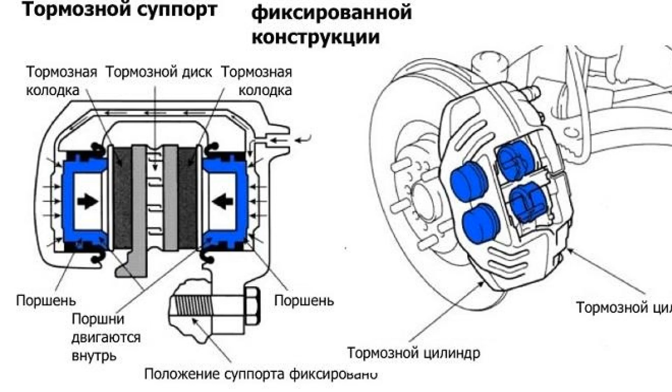Let's get into it. How the brake caliper works. As it was said above, the main mission of this element is to supply certain forces to the brake discs, leading to the stopping of the vehicle. To many people it seems quite ordinary and simple at first glance, but everything is much more complicated. Consider below what stopping a vehicle looks like in the case of a serviceable and well-oiled component.

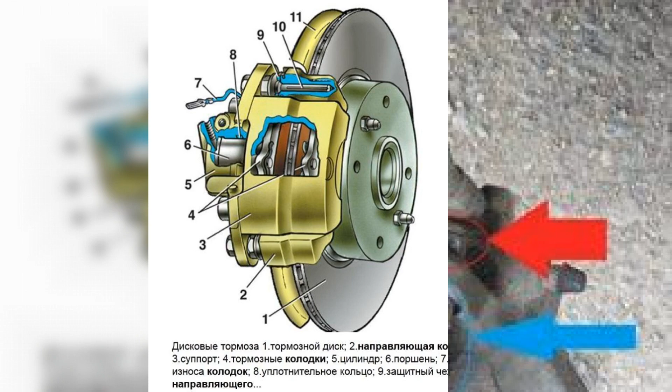The driver depresses the pedal, thereby creating the pressure necessary to transmit to the brake piston system. The caliper holds the stoppers against the disc, clearly and evenly. It's important to understand that the system clenches the disc on both sides, ensuring effective pad retention. No matter what speed the car is traveling at, the friction slows down wheel rotation. Of course, this is a very useful property, but there is a negative effect associated with physics and its laws.

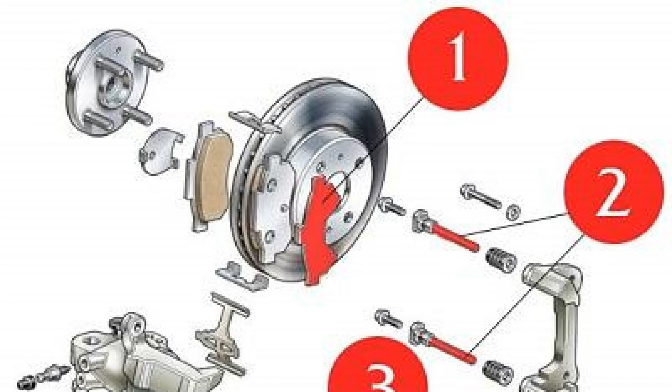The thing is that energy is never wasted. In this case, it simply changes. Note: energy, when it comes to this system, becomes thermal energy and heats up the brake fluid, the pads and the caliper itself. This a priori means that the latter must be robust, to withstand thermal loads, and on the other hand have sufficient heat dissipation to transfer heat efficiently and quickly.

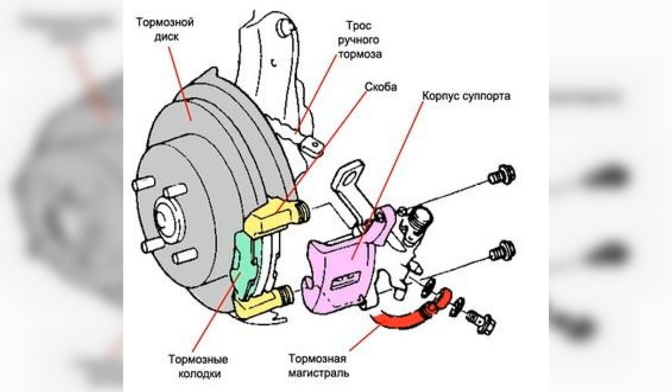Brake caliper problems. Let's take a look at the popular types of malfunctions. The second malfunction is associated with the rupture of the piston dust cover. As a result, dirt penetrates inside, shrinking the cylinder piston group from the inside and contributing to corrosion and splintering. Squeaking can be caused by the presence of skewed or incorrectly placed pads. Quite often pads are put by inept hands in reverse. They are simply confused in places.

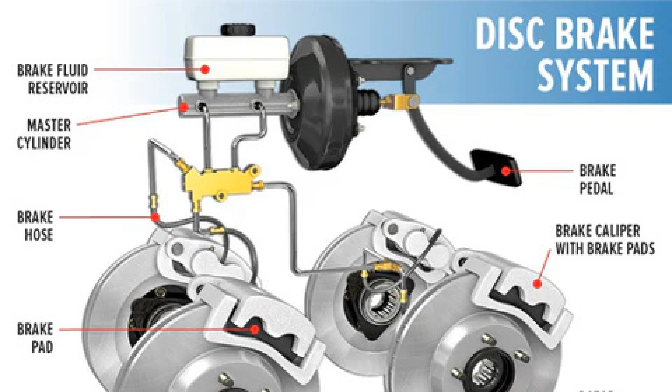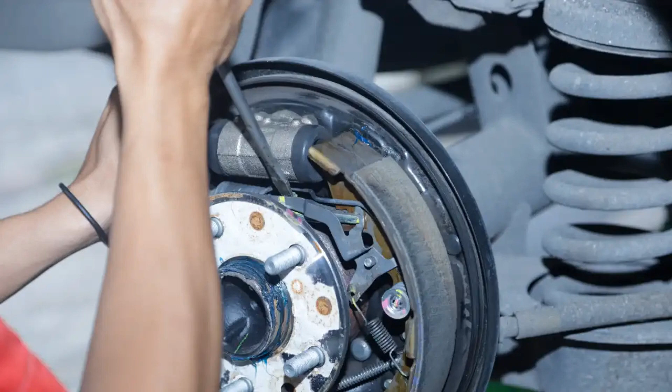As for the rupture of the dust cover, the reason for this is purely mechanical things. For example, if the discs wear out due to constant and excessive loads, and the owner of the car does not notice it, or there is simply no time and money to put new ones. Only a good lubricant can extend the service life of the brake caliper. We are not talking about ordinary brake guide lubricants, but about special ones. The latter are designed to eliminate not only the consequences of high-temperature loads, but also the effects of salt and dirt composition.

How to check the brake caliper? It is extremely important to timely diagnose the normal functioning of the elements. Below is an instruction describing the front caliper, its check and restoration. The task is as follows: disassemble the caliper, clean it, including from old grease, lubricate it with new special grease, diagnose the rubber sleeves and dust covers for their integrity, and if necessary, replace.

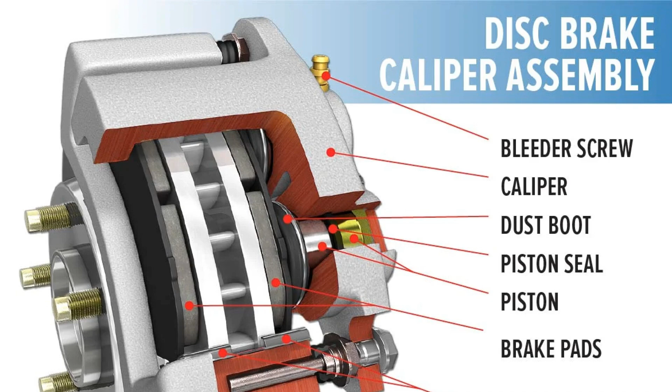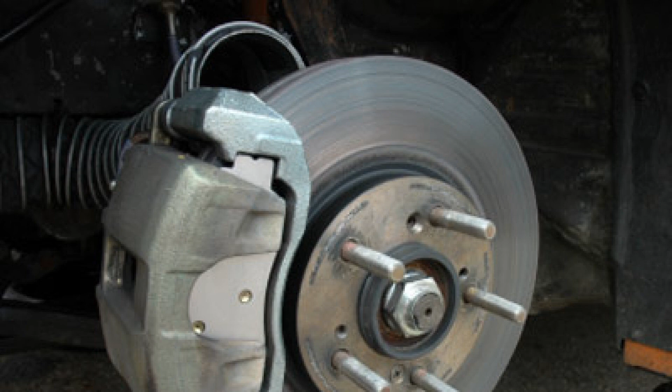The lower bolt fixing the body of the element to the bracket is unscrewed. After that, the housing is tilted upward. The pads are removed. If they are worn out, they are replaced with new ones. The upper bolt holding the housing is unscrewed and fixed to some suspension element. The fluid tube does not need to be disconnected yet. The bolts securing the caliper clamp are also unscrewed. The clamp itself, the rails and the pad pin are also removed.

The piston is removed from the housing. Now it is time to disconnect the fluid tube connected to the caliper housing. The trunk line should be tightly plugged with an M12 bolt or something else to prevent the fluid from leaking out. In the end, the caliper fuselage and clamp will be on a clean and level work table. These, too, disassemble to the last. Having provided access to all the internal elements of the parts, it is necessary to check them thoroughly.

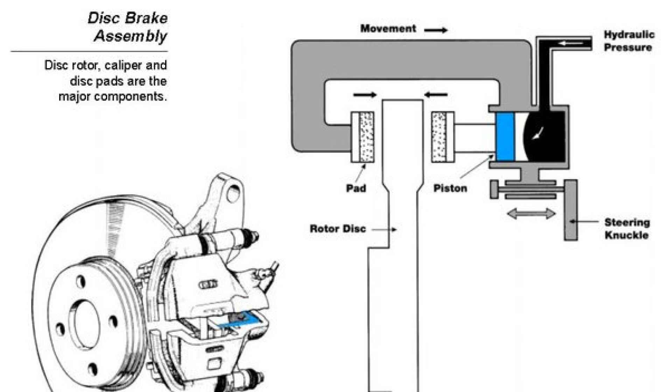Attention! Often the caliper guides sour, because of which when braking, the car moves away to the side. It is necessary to pay attention to all this. Sour guides are good to clean to a shine with the help of various liquids. Ideally, there should not be any scratches, dirt and scoring on the insides of the caliper system. Lubricate them with universal grease. It is even better to replace problematic components of the internal system with new ones. Most of all, this applies to dust covers, cylinder seals and other small but very important parts.

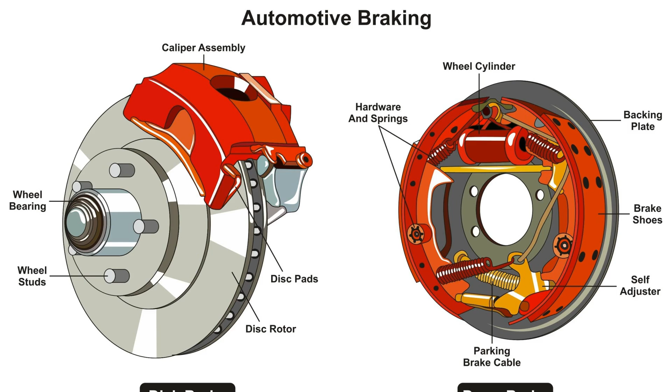Rear axle mechanism. Disassembling the rear caliper will be much more difficult. This is explained by the fact that the rear element has a more complex structure, since it is supplemented, unlike the front, with a parking brake mechanism. Otherwise, the nature of operation of the element is similar to the front one. The fluid helps to push out the piston, which presses the pads to the wheel disc.

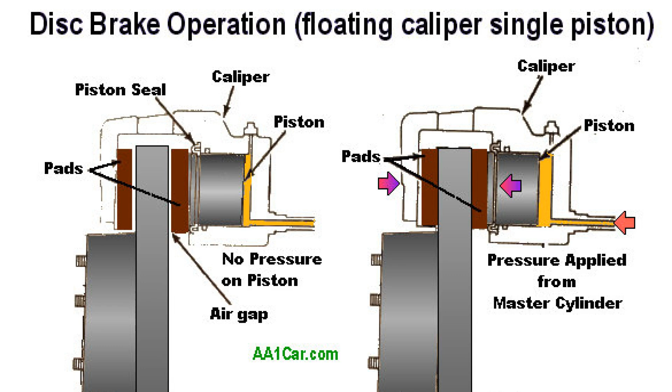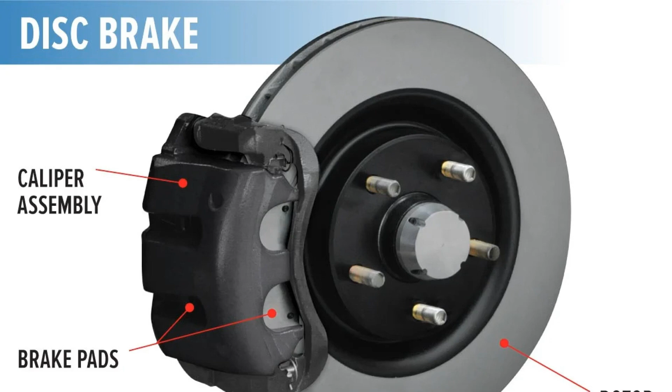Do not miss. In conclusion, understanding the operation of brake calipers is essential for any vehicle owner. We explored their design and the principle behind their function, highlighting their critical role in ensuring safe braking. Regular maintenance and timely repairs can significantly extend the lifespan of your brake calipers and enhance overall vehicle performance. By staying informed and proactive, you can ensure that your braking system remains reliable and efficient, keeping you and your passengers safe on the road.